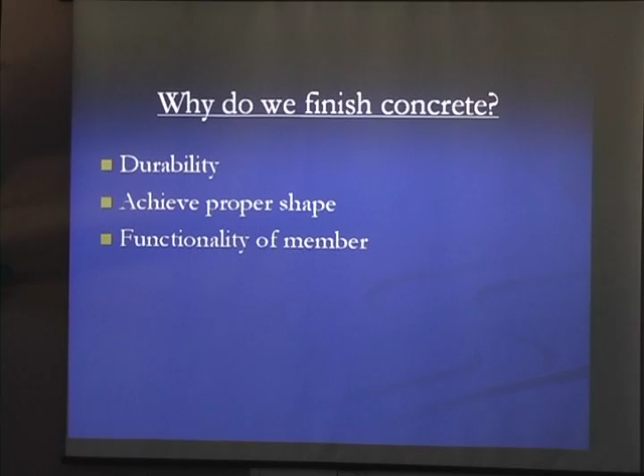And there's some other reasons too. We want it to be shaped properly. Sometimes the shape of concrete is important to what it's supposed to do - the function of the member. When we're thinking about this concrete that we're pouring, what's it supposed to do? Why are these details in the plans the way they are? What's the function of that member?

Appearance is another thing. A lot of times we want to look good. Appearance makes a big difference. And it's also a contract requirement that we properly finish concrete.

All right, durability, let's get up there. The American Concrete Institute says durability is its resistance to weathering action, chemical attack, and heat, abrasion, and other degradation processes.

What is this? Weathering action - we're talking about elements: rain, snow, sleet, wind, working on that concrete, just exposure to the elements. Chemical attack - what kind of chemicals attack our concrete?

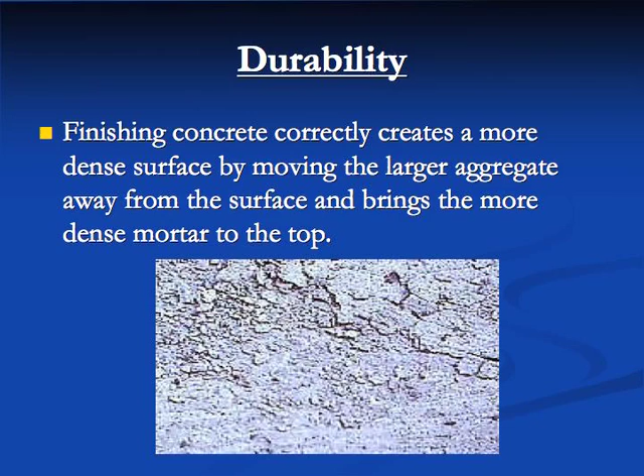It consolidates it. It seals it - seal is a big word. Finishing concrete correctly creates a more dense surface by moving the larger aggregate away from the surface and bringing the more dense mortar up to the top. That more dense mortar, when you bring it up and strike it off, seals that concrete up. We don't have a lot of exposure to porous aggregates on top.

That's not really a good picture, but you can see how that used to be concrete. Now it's crumbled up concrete.

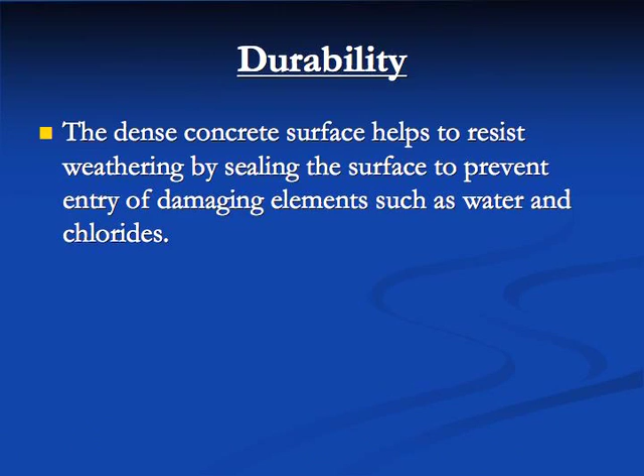So the dense concrete surface helps to resist weather by sealing the surface to prevent entry of damaging elements such as water and chlorides. Chlorides cause a lot of damage to our structures, right?

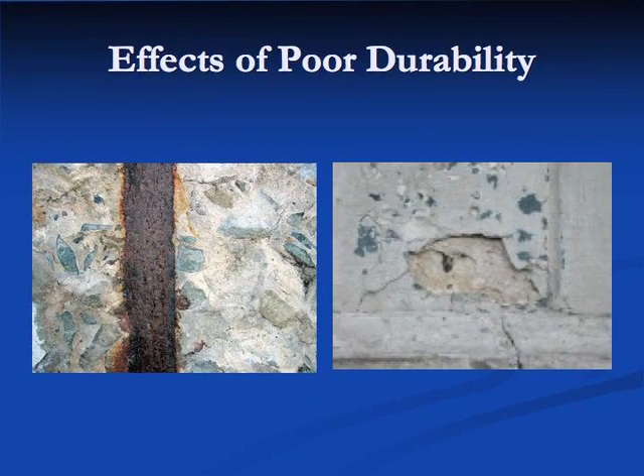What's that a picture of? What's this big brown thing right here in the middle? What's this loose, crumbly concrete? That's a piece of reinforcing steel. What's wrong with it? It's rusted. What do things do when they rust? They grow out. You get a crack in the concrete, a little spalled area exposes that steel member to the air and the chlorides, and it starts to rust. That rust builds up, that scale expands, causes more spalling, more cracks, more rust.

What happened to that Charlotte Footbridge at the racetrack? I'm not 100% sure, but I think what happened was they used pre-stressed concrete members and introduced calcium chloride into the concrete. Whenever they cast those members, it ate that cable, that pre-tension cable, and when it got loaded it no longer had the pre-stressing reinforcement. People were on it, and it failed. We had problems with that - it may not necessarily be a finishing issue, more so a construction issue.

All right, a couple other pictures of poor durability. This is a curb and gutter line on an old bridge. Where do our salts and chlorides end up a lot of times? In that gutter line. Once you get a little spall started, especially in a very susceptible area, it continues to work on it and it doesn't stop until we replace the bridge.

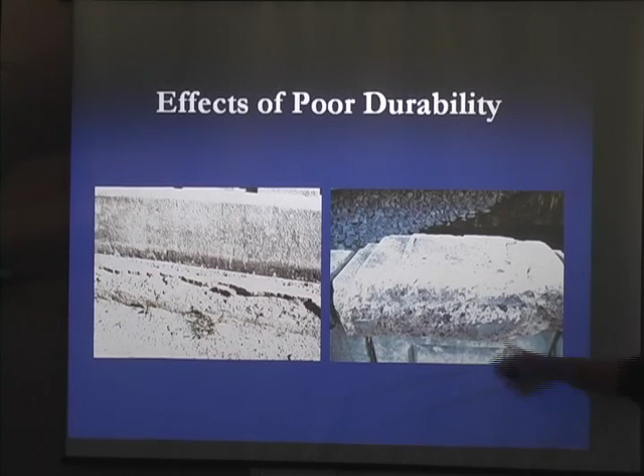This one shows some weathering action. This bridge gets a lot of - some of these mountain valleys get a lot of air, a lot of wind through here, a lot of rain. Some of this looks like it's been beaten off with a hammer, but a lot of this exposed aggregate you see in this area has come from just weathering. It doesn't look like somebody's been beating on it. So anyhow, a few things that can happen.

All right, moving on to proper shape. Why is proper shape important? Think about it - it's very important on certain types of members, like curbs. What are they designed to do? What's the function of that, other than keeping us from running off into the river?

Or if I go down the road and I'm not paying attention, reaching for something in the floorboard, and I hit one of these, hit a barrier rail, what's it supposed to do to me? Spin me around the highway? Send me right back in that same direction I was intending to go anyhow, right?

All right, proper shape. That's the reason it does that, the shape. Shape up, same way with curbs. Let's talk about bridge seats and caps.

What happens on a bridge? We got bridge seats underneath, above a bridge seat we got a joint, usually some type of joint. What happens on that joint? Hello, you bridge maintenance guys, what happens with bridge joints? Well, they stay sealed up forever, right? They leak. What happens then is that opens up a pathway for all your salts and water to go down around their bearings, and then they start eating up, destroying their bearings. They destroy our girder ends.

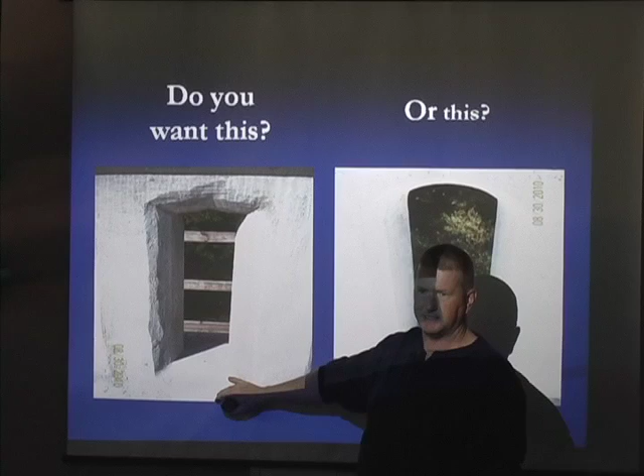All right, proper shape, which one do we want? This is the first pop quiz. You want this one, or this one? Have I got my proper shape on this decorative rail that I'm paying two or three more times the barrier rail price to get? Like I said, am I satisfied with that?

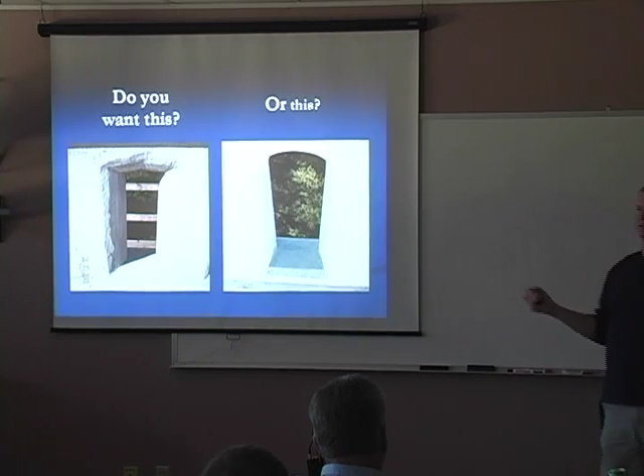If you are, I keep telling you this, but if you're not, then what we're looking for is nice, clean, neat shape, straight lines, good appearance, proper shape.

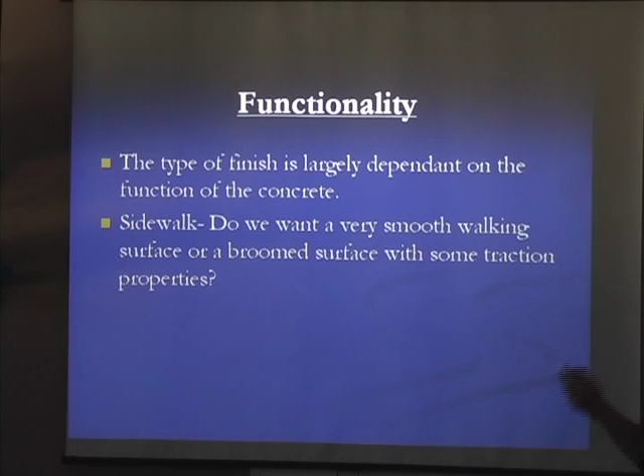What do we do about sidewalk? How do we finish sidewalk? We broom it, right? What's the function of that sidewalk, to walk on? Part of walking, we don't want to slip and fall and break our neck. So we give a broom surface to sidewalk because of its function. Everybody knows what broom sidewalks are, but that's a good example of why, when we're finishing concrete, to be thinking about function.

Something a little bit more important about, I'm going to jump back on bridge seats. What are their functions? What's the function of those bridge seats? They just transfer that load from the bridge deck through the girder, through the bearings, into the cap, at the seat, and down to our foundation, right?

We'll talk about construction joints in a minute. Think about it, we're loading up a bridge seat. What's the function of that bridge seat? To transfer that load, right?

If it's a little uneven and I've got an elastomeric bearing pad, then it sort of takes care of a lot of problems. It sort of conforms to the shape. Maybe it ain't too bad if I don't have a real bad, poorly finished bridge seat.

But think about more rigid bearings, such as a pot bearing. You got your masonry plate at the bottom, got your load coming down, nice even bearing surface, we got even load distribution on our cap. That's what the designer intended to have. That's why he drew those pictures with straight lines instead of squiggly lines on the plans. He intended to have good uniform load distribution through that cap. It's a major part of his design that he's not point loading, he's got uniform loads.

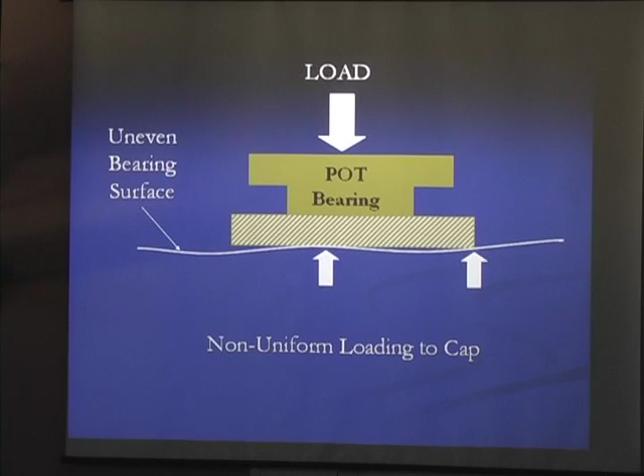If we got an uneven bearing surface, poorly finished, something happened, missed a grade, then when we put that same load through that bearing, we get point loading down here and it's not uniformly loaded. So this is not what the designer intended to do. So finishing concrete can have a major influence on the function of that member.

All right, mention construction joints. On the culvert floor, we pour the floor slab, we put a little riser wall here. Sort of hard to see, but little riser walls here, to center forms against the pour walls. How important is it to finish this construction joint? What does it do?

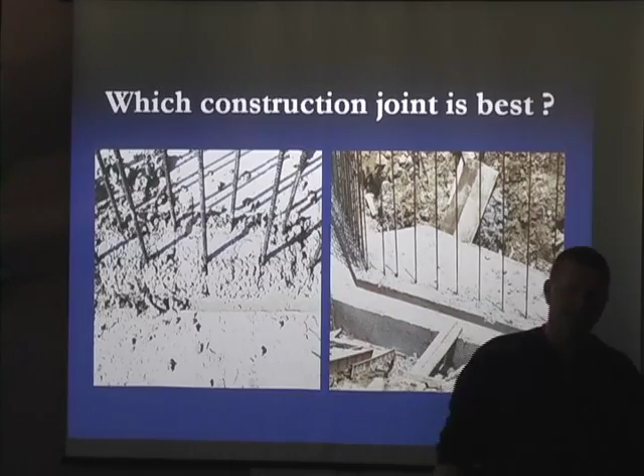Which one would you rather finish? Which one would you rather have on your project? A nicely finished wall riser, or like this one or this one? This one, right? Why is that necessary? When I put my wall form up here and I pour my concrete eight or nine feet down to this wall, and I stick my seven-foot vibrator in there, what happens when I pull that form off?

Honeycomb - we don't want it. Am I getting good load distribution through this? If I got a rough area, am I not getting good concrete contact? No. What about this one where I got nice, good, straight, neat joints, building a construction joint? I got more of an opportunity to get good consolidated concrete down here at the bottom, and I get good load distribution from the walls. Everybody's happy, done a good job.

You pull the forms off, you see all kinds of things in there - big honeycomb, reinforced steel, daylight, or water in it, it leaks. It all happens, you see it all, do it all. So think about what is the function of this thing I'm doing, and is my contractor helping me achieve that for proper finishing of the concrete?

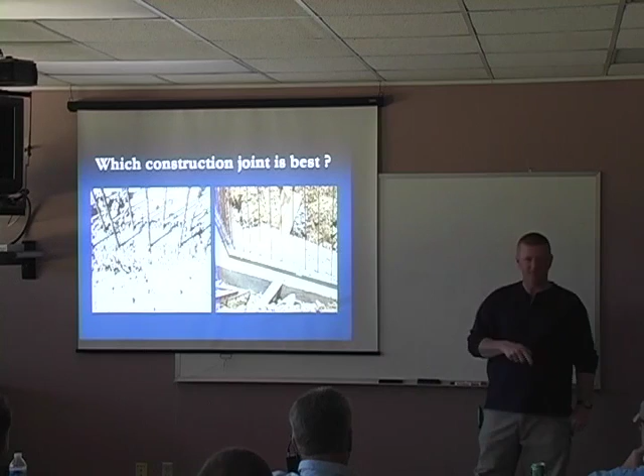Moving on, appearance. What's so great about appearance? We're building a bridge to drive on, right? We want it to look good. Bottom line, when we build something, we got a lot of concrete out there - it's a statement about the quality of work we're doing. If we give you an ugly looking product, what's your initial thought as a driving public thinking about the quality of that work? Bad, right?

I told them in class yesterday, we got highways full of highway engineers going by every day inspecting our work - we call them traveling public. They're all highway engineers, or so they think, and they can judge the quality of our work just based on what it looks like. So make it look good, uniform color and texture - it's all part of obtaining a proper finish.

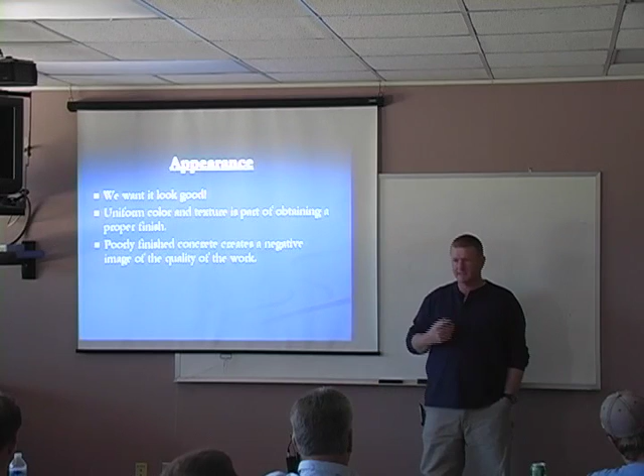There's a mention that poorly finished concrete creates a negative image of the quality of work. When we talked about that bridge we rode across in Eaton, we noticed it looked good. The guy that done that, what was he? What type of finisher, what type of laborer was he? Did he take pride in his work? Yeah, he wasn't just trying to get it done, he wanted it to look good. He took pride in his work, and in return we got a better product.

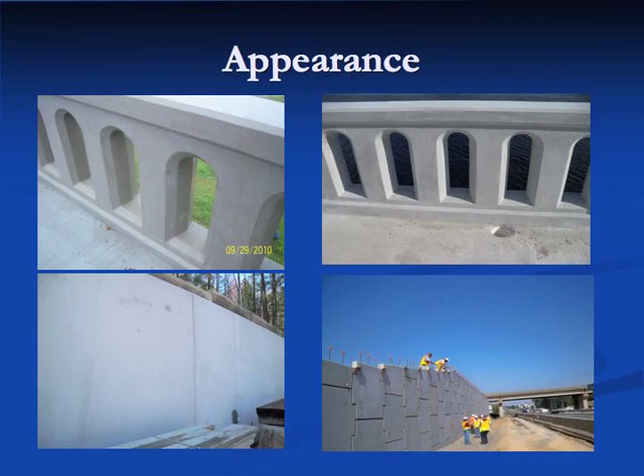So we go down the road and we see ugly looking rail - negative image. What's the first thing you see when you come up on a bridge site? You look at that rail, you're not looking at the columns. You see the part that you can see - walls, MSE walls, gravity walls, or soil nail - any kind of big concrete draws your attention because it's a big old huge mass of concrete. And what does it look like?

Make it look good. That guy who come in here really worked that and put a lot of effort in there - we talked about it a little bit yesterday. He was an artist, a craftsman. He wanted it to look good, he wanted to make it... but that's disappeared. Now we've got folks where the concern is not doing good quality work - the concern is getting it done so I can get paid and do something else.

Back to appearance. Contract requirement - goes without saying, but let's say it anyhow. According to your standard specifications, we require the concrete to be finished correctly, section 420-17. If you don't believe me, look for section 420-17 in your spec book, that covers the whole section on finishing concrete properly.

What does it say? Finish all concrete as required by this article, except bridge decks. Cameron spent most of the morning telling us how to properly finish bridge decks - I'm talking about everything else. So all concrete except bridge decks - we have a special provision for bridge decks. Everything else falls under 420-17.

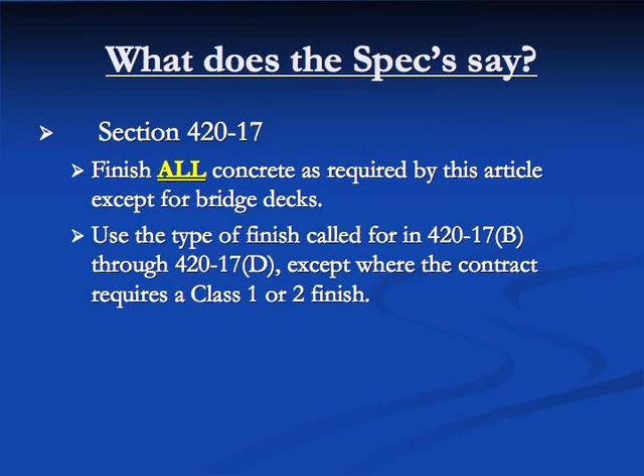The type of finish is explained there. We got different types of finish, we'll talk about that here in a little bit, but it tells us how to achieve those finishes. Here's our types of finish: we got ordinary surface finish - most all the concrete we do, if it's formed, gets ordinary surface finish. Unformed surfaces, sidewalks, islands, all have a particular type of finish - Class 1 and Class 2 finishes. These five different finishes is what DOT requires on all concrete, with the exception of bridge decks. Before we get into that, what do you think affects the concrete by the finish?

Another factor is the type of concrete mix. Our higher strength concretes, our double A's and A's, have more cement in those mixtures than our lower classes. So more cement means more mortar. Our cement and fine aggregate make that mortar. With these higher classes of concrete, the double A's and A's, they have more mortar, more cement, for finishing. Obviously, that makes it easier to finish.

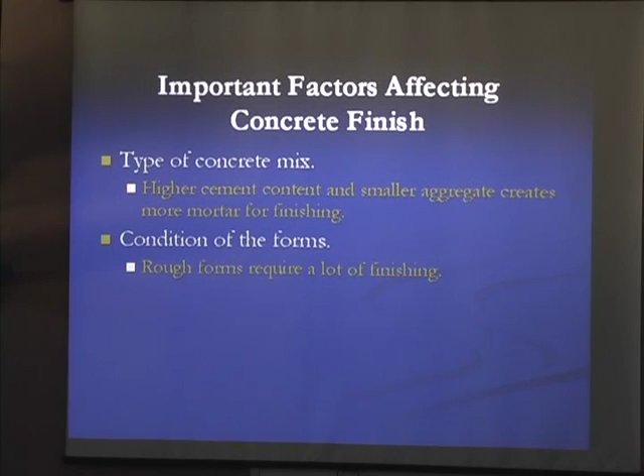Condition of the forms. If you've got a rough form, what's your concrete going to look like when it comes off? Just like that form, right? Placement and consolidation - can I properly finish concrete if I don't properly place and consolidate it? No, it makes it hard. You can finish it, but it takes a lot more work to do it.

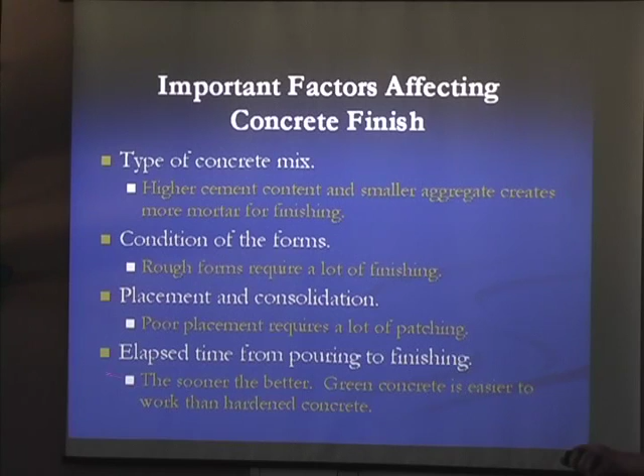And elapsed time from pouring to finishing - really, the sooner the better. The longer that concrete sits out there, the longer it waits, the hotter the weather is, the quicker it sets, and the harder it is to finish that concrete.

Alright, let's look at a few of these. Form condition - have y'all seen any of this stuff on your project, any of these types of forms? I've got openings here. I've got this sticking up about three-quarters of an inch higher than the other one. That form had rolled up. It's been out there in the weather, they've used it 14 million times, and it's rolled up.

Contractors use it anyhow because forms cost a lot of money. I've got spalled out areas in it. If I pour concrete on top of these forms, what's it going to look like when I pull the form off? It's going to look like the opposite - a mirror image of that. Is that easy to finish? If I've got to get in there with a stick and take care of this?

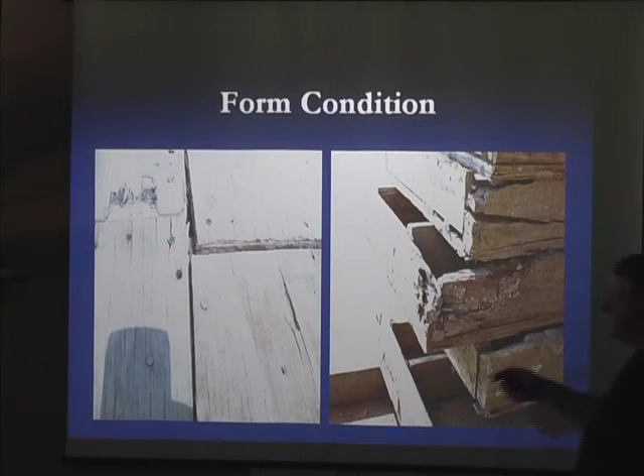Sometimes a contractor may have some gaps in his forms because everything's not perfect. If he fills that in with expanding urethane foam or whatever, once it sets, it needs to be trimmed back so you don't have a big knot in your form. That just allows him to use those forms, period - you don't have to worry about it.

What about these? As far as the cracks, especially on a curved bridge or curved girders, just trying to get it fit up, you're probably going to have some cracks in there, and they'll probably try to seal it with 'great stuff' or similar foam. If they do that, make sure you get it trimmed off flush with your forms and don't leave a knot.

But if you see junk like that, I don't care if you're getting ready to pour concrete - if you walk out there and notice a big blistered up form, you have every right in the world to tell them to take it out. Something warped like that, you typically try to get rid of.

Once it's flat, you can transition. When's the time to start looking at these forms? When he's got the steel in it, ready to pour? Yeah, he starts forming this stuff - take a look at them as they bring it in and drop it off. Looks like these forms are actually used.

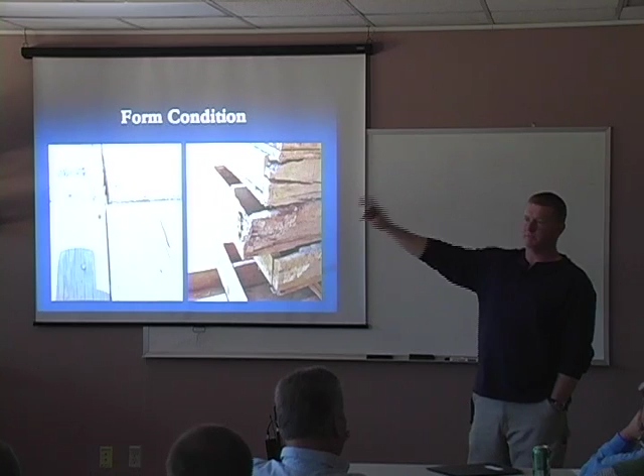When these particular forms were removed, part of the face of these forms stayed in the member that was cast. Is that a finishing nightmare? Absolutely. And another thing about the condition of forms - if that form is going on the fill face side of the end bent, that's one thing. If it's going on the face of your wall, like a cast-in-place retaining wall, that's something entirely different.

So think about what it's going to look like when I get done. Do I care if I've got a bad looking place on the back side of a fill face? Probably not. Do I care if this is out there where everybody can see it? This is going to have to be fixed and we're going to have to work it.

If you get stuff like this, tell them these things are old or dilapidated, got a little termite damage. They've been around a while. These need to go in the dumpster. And that's ultimately where these ended up. The guys formed the concrete, he wanted to keep them, use them on the next job. Prime said, nope, them's going in the dumpster. And that's where they went. He loaded them up and threw them away.

But anyhow, form condition means more, it's got a large influence on finishing. So when we talk about finishing concrete, where does it start? When they pull the forms off? When does the mindset think? When does it start? You need to start thinking about finishing that concrete when you start forming it. We need to start thinking about what it's going to look like when we take it off.

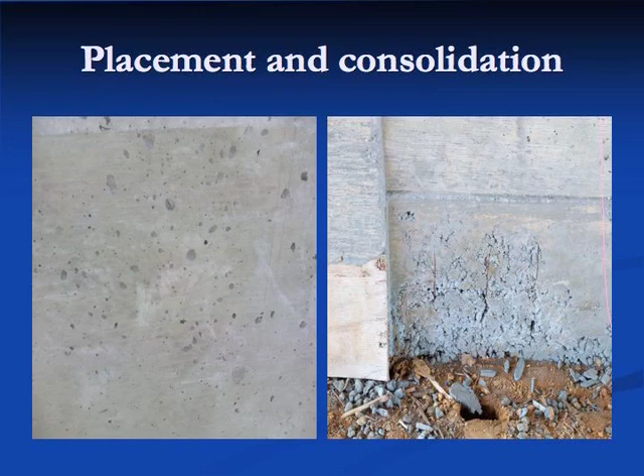All right, placement consolidation. Get anything look like this on your job. Pull the forms off, we got some pretty large air pockets in here. Nothing looks real structural, but some of these things need to be patched. We got some places that need to be fixed. What's this booger over here?

Anybody seen that before? How do we need to fix that? Smear a little grout over top of it, right? Hide it. Guys, you pull your forms off, bad day or whatever. We don't get good consolidated mix up here. We need to take a little bit of investigation. Y'all guys mentioned chipping it out. Get hold of your hammer and take a look at it and let's see what kind of problem we got here.

Does this segregated concrete mix go all the way through the deck, or is it just a little bit of surface irregularities? That's a question you need to ask yourself.

Once we do that, we need to decide how we're going to fix it. If we got a great old big void in here, by all means that needs to be chipped out and put back with something other than grout. If it's just a little bit on the surface, maybe we can seal it up with some grout and be fine.

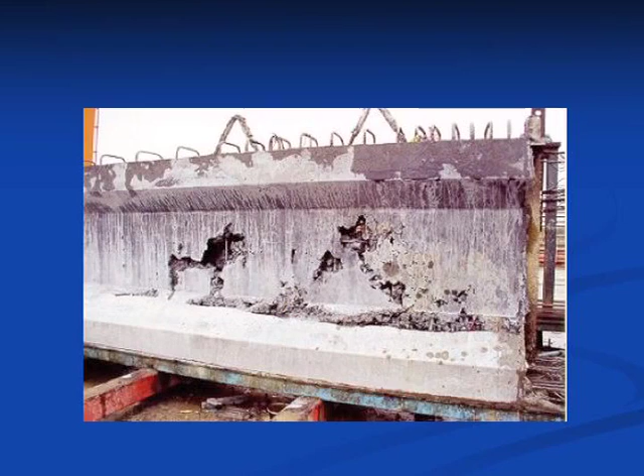All right, what about this? Grout it up and send it out to the job, right? That's good to go.

Bad things can happen. Had some slip form barrier wall that turned out looked pretty good on the outside. Got ready to bolt the guardrail to it, bored the hole in, inside it was hollow. We found the hollow place. Things can happen. We don't fill this thing full of grout. If you do, flag it so I don't drive across it.

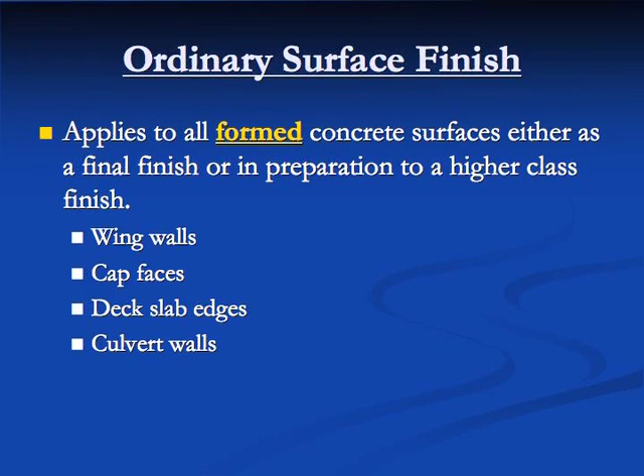All right, going back, ordinary surface finish applies to all formed concrete. If we lay up two sheets of plywood and we pour concrete in between it, it's formed concrete. Anything we form, unless it requires a different type of finish, gets ordinary surface finish. So what I'm talking about: wing walls, caps, edge of deck slabs, culvert walls, gets ordinary surface finish. How do we get it?

All right, proper placement of concrete, as we mentioned, is a major factor. If we place it poorly, we got more work to do to get this ordinary surface finish. We're using ordinary surface finish on probably 90% of what we do, other than bridges.

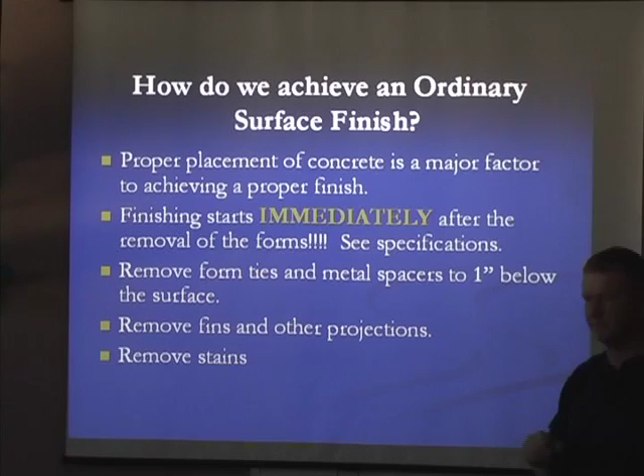When do we start? If you don't get anything else out of this presentation, the best thing that's gonna help us, finishing starts when? Immediately. On your handouts, on your slideshow, take your pencil and circle immediately like 12 times. Or when you flip through it, you'll know it means immediately, after removal of the forms.

Why? The specification tells us that, but why is that important? It's easier to be able to get what we want. What if we wait two weeks? What's happened to that concrete in two weeks' time? It's cured, it's dense. What's happened to that mortar? It's set, right? Can I get that mortar back up? Can I work that mortar back up to finish it?

No. The reason we're not doing this, well, why is the contractor not doing that? What's his goal in life? Time. That's right, time and money. What does it take for me to do this? A couple people. If I pull that form off, what am I going to do with that form? I'm an ambitious contractor. I'm going to take it down here and I'm going to put it up again and I'm going to pour more concrete in it, because that's how you're paying me, by how many cubic yards of concrete I put in that form. All right, we also pay them by how much it's supposed to be finished.

So is he caring about finishing that concrete? No, he's worried about making pour more and more and more. We'll see some effects of that here in a little bit. All right. Finish starts immediately.

Remove form ties, metal spacers 1 inch below the surface. When you put them in there, you use snap ties, break them off, little cone, pop that cone out. It's supposed to be patched in, 1 inch below the surface. Fins and other projections, we will remove those. Like the places where you got 2 forms come together, you pour concrete, you get a little fin between them 2 form marks. Remove those. That's required of ordinary surface finish. And removing the stains.

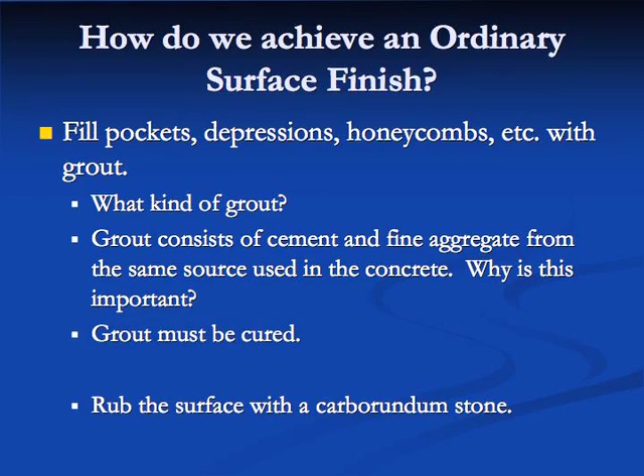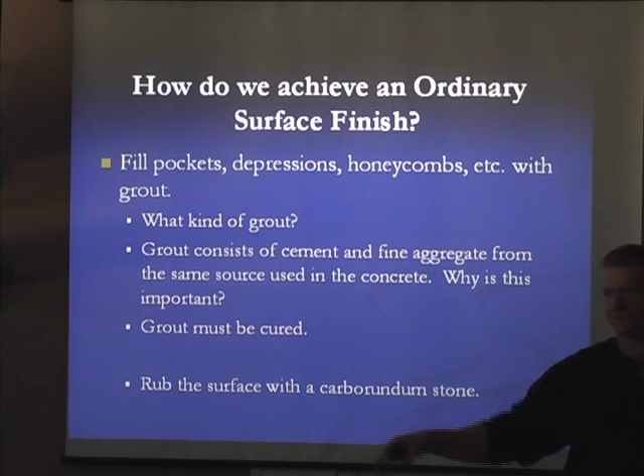Once we patch it, what has to happen to that grout? Got to cure it. Whether we use non-shrink or bagged sand, grout must be cured because it's just the same as concrete. We want to give it every opportunity it can to bond to that existing concrete, and we want to make sure that patch is not cracking or falling out of shape. So we want to cure it. Give it every opportunity to do what we want it to do.

After we've removed our fins and our stains, and we've filled our pockets, depressions, honeycombs with grout, we're going to rub the entire surface with a carborundum stone, or a rubbing rock as I like to call it, because that word's too hard for me to say, to a uniform color and texture. Pretty simple.

How do you get this? What you got to use to get this? Manpower, labor. Takes time, takes money, right? Labor takes time, time's money. Money's what the contractor's after. How do we get his attention? We gotta grab him in the pocketbook. Is he doing what we want him to do? It takes time. That's why he's wanting to pour that concrete, so he can make that money.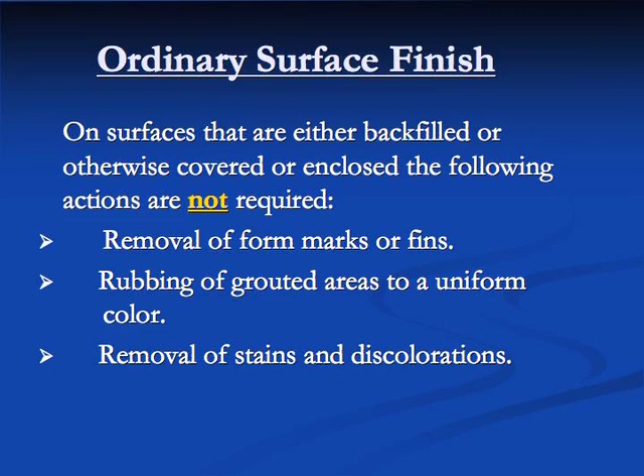Now, on ordinary surface finish, on surfaces that are either backfilled or otherwise covered or enclosed, in other words, we'll never see them again, hopefully, the following parts of ordinary surface finish are not required: removal of form marks or fins, rubbing of the grouted areas to a uniform color, or rubbing the whole surface to a uniform color, removal of stains and discolorations.

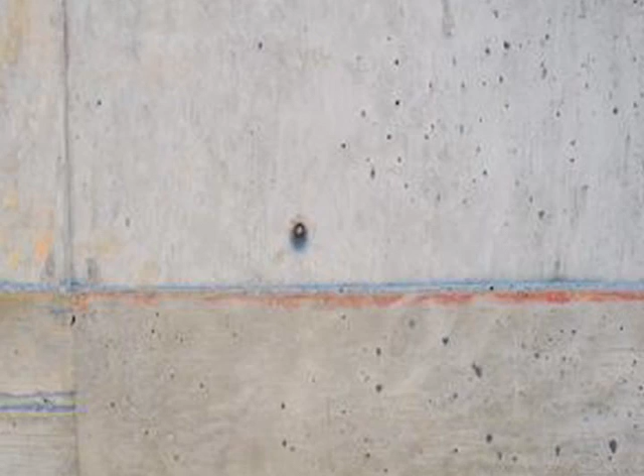So if we're on the backside of a wing wall, all we've got to do is patch any depressions, pockets, honeycombs, remove form ties and patch, and we're good to go. We don't have to rub the whole surface to a uniform color and texture, but we got to take them off. If there's a little pocket where a form tie was and you broke it off, we got to patch that area. You may have some pretty big air pockets in here. We need to put some grout in.

What about form ties that are less than, I think it's 0.05 square inches or something, but it comes out to be form ties less than a 1/4 inch in diameter of steel. On the back side, we can cut them off flush. We don't have to take them down 1 inch below the surface.

For less than a 1/4 inch, we can just take our grinder and zip them off. Most time, contractors use these form ties and they'll twist them and they'll break off back in there. If they do, we need to patch that hole. But backside, we can leave it looking a little rough. We're gonna cover it up, nobody will see it. If it's exposed, then we need to finish it. We need to patch it. We need to remove the forms and the fins, rub it to uniform color.

All right. On caps, it tells us exposed surfaces should be rubbed to uniform color and texture. Top cap should be finished smooth, which conforms to the plan details, grade, slope, etc. in your plan. There's your bridge caps. That's where you want to get your drainage. You want to make sure you got a good uniform loading system on your railing, parapet walls, your barrier rail, end post.

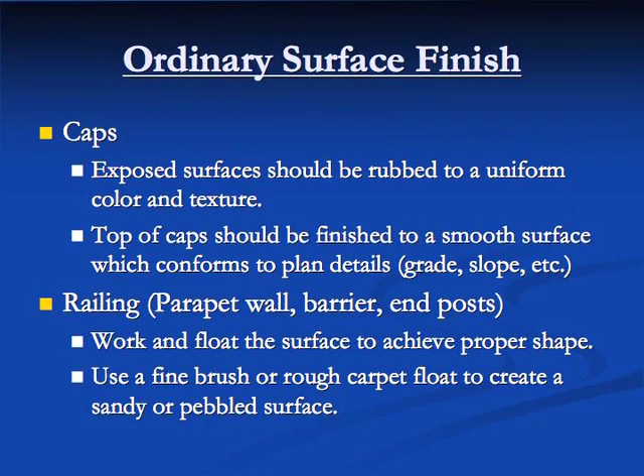Once you work the surface and float to achieve a proper shape, there's that shape word in there again. Use a fine brush or rough carpet float to create a sandy or pebbled surface. All right. And we generally do a pretty good job on that. We get our shape, and then they'll broom it and brush it to get a little grainy, pebbly surface. So that's good. That's what we're after.

There's a picture of an ordinary surface finish. Good uniform color, good texture. If you look real close, right in this area, you see a little circle. Maybe we had a form tie and we've patched it. It may be hard for y'all to see, especially in the back of the room. But right in this area, it's a little bit darker.

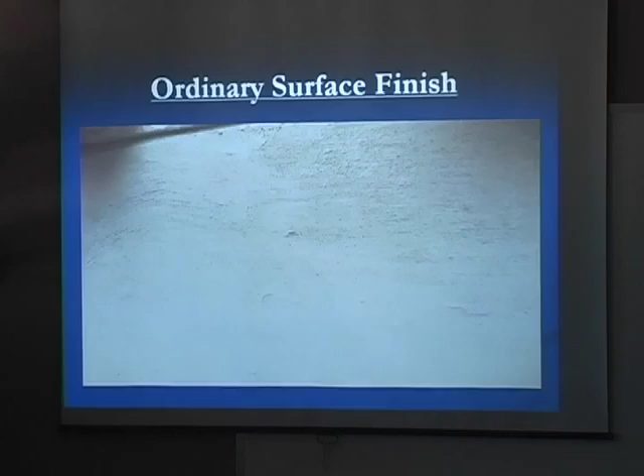And what it tells me is maybe we didn't use cement from the same source of aggregate. We used some non-shrink grout and we patched it over. And then when we rubbed it, we tried to hide it, so to speak, blend it in. So, but overall, a pretty good picture of ordinary surface finish.

I don't know why that projector's a lot brighter than that other, because these pictures aren't showing up. But picture some barrier rail, it's a good grainy texture to it. Projector's real bright. It's not bringing out the pictures as clear as I want them to. But anyhow, good picture of ordinary surface finish. Yeah, that one sort of. There's two big white blobs that don't look too good. But anyhow, they're ordinary surface finish. So, that's what we're looking for.

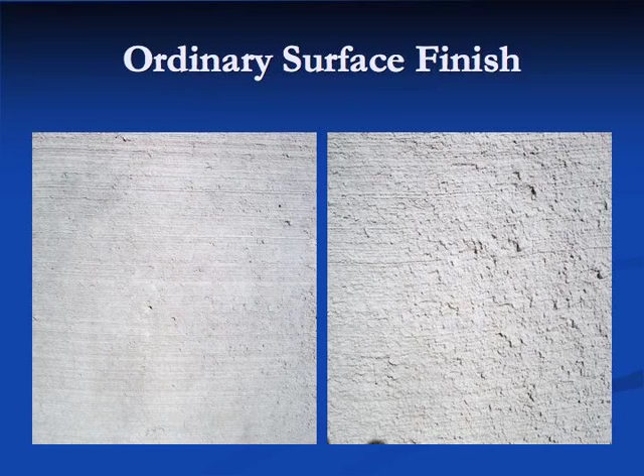Cameron's passed out a couple of these. Just give them one. That's the surface of that, the one that looks like it's been finished. What we sort of look for in an ordinary surface finish: it's not slick, it's rough, it's got some texture to it, uniform color. It's what we're looking for. It's got some

Unformed surfaces not subjected to wear. Alright, what we're talking about is things like the buried footings, top of a footing. It's unformed. We dig a hole in the ground, pour it full of concrete, maybe the top of a shaft or something that we're not forming the top of. We finish it by striking off excess with a wooden template, forcing coarse aggregate below the surface. Pretty well the whole requirement for an unformed surface not subjected to wear. In other words, we're going to cover it up with something.

When we just finish it off with a wooden float, what does that do? What's the purpose of doing that? Why do anything? But what's the purpose of just raking it off, bringing it to the proper grade, and floating it down one time? What's the purpose? Sealing the concrete. That's the one I was looking for. Seals the concrete. That's the purpose.

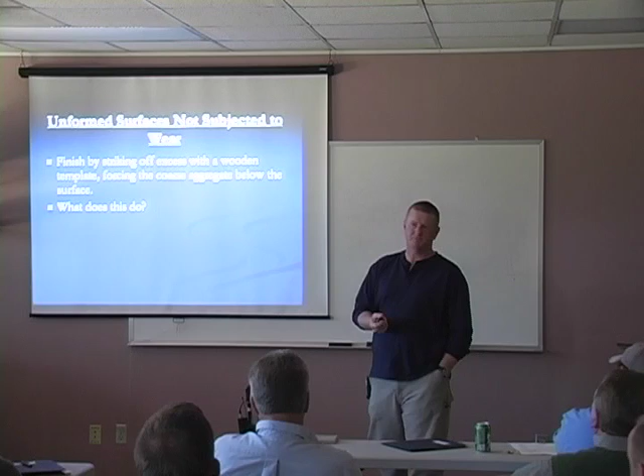All right. Sidewalks, islands, and stairs. When you're doing sidewalks or islands, we're going to have to build a form or something to put in. The top of it's going to be exposed, but of course it is going to be subjected to wear. So we may have a side form. We pour our concrete in there. We strike it off. Take a float. We float it down. Then we trowel it smooth. What does that trowel do?

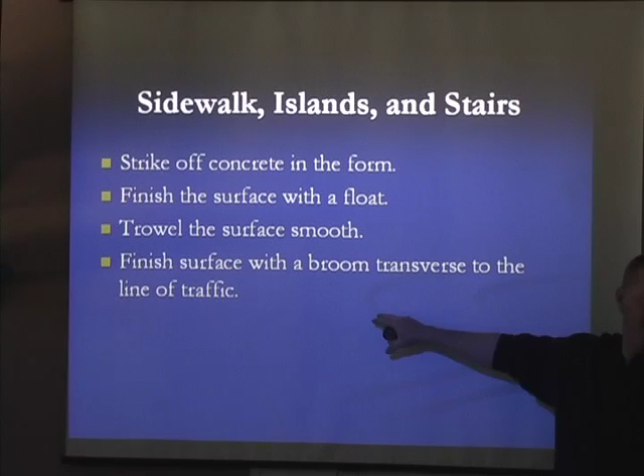Brings more of that dense mortar to the top, right? Slicks it off. Then we're going to broom it. In order to broom it and get a good job of brooming, we've got to bring that mortar. We've got to get a good mortar bed on top of it to do that with. And that way, when you broom it, bringing more mortar to the top with the trowel does not allow it to catch those little bitty small aggregates and flip them up.

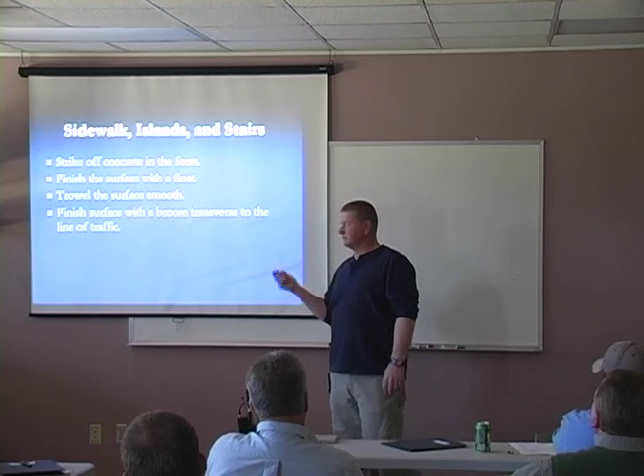Anyhow, sidewalks, islands, stairs. All these are in your spec book. It tells you word for word what I got here. Couple pictures of broom finish. And guys, I apologize because that projector's a little better than what we're used to. It's pretty bright, but broom finish. Y'all know what it looks like.

You've seen it before. On this particular one, we did some sidewalk on the Integral Bridge, but we had the construction joint down here. What should we maybe have done differently here? We should have put the joint right here instead of right here, shouldn't we? Yeah. So, but we did. You know, hindsight's 20/20. We screwed up.

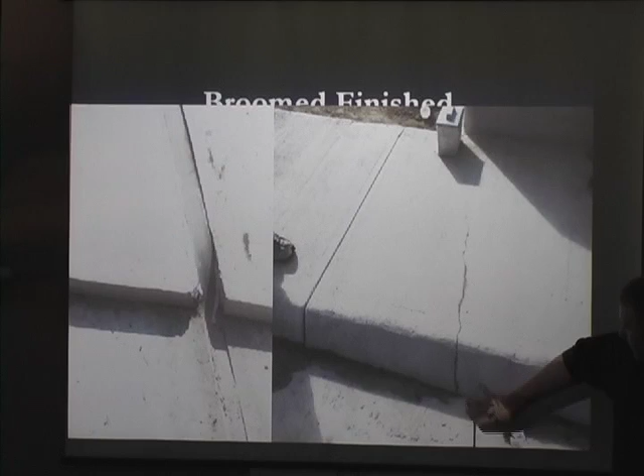And if you ever have a cored slab or a box beam bridge that has got deck drains running underneath the sidewalk, you better go back over every one of those deck drains. You need to double joint it. If you don't, you're going to end up with a joint looking like that right there. Sometimes they just put a pipe or something through the sidewalk. It could be a square or round pipe. They will crack. All right. Moving on.

Class 1. What do we use a Class 1 surface at? Parapet walls, decorative bridge railing, anywhere we need a more aesthetically pleasing look. How do we know if we've got to do a Class 1 finish? The contract, the plans, or a detail in the plans showing this wall requires Class 1 surface finish. Something's going to tell us that we need a Class 1 finish. All right. How do we get it?

So we pull our forms, we start patching our areas, we fill our depressions, we do everything. As soon as that pointing sets and we get those little repairs made, what do we need to do? Wet the surface and rub with a coarse stone to create a paste on the surface. This removes all the form marks and projections and produces a smooth dense surface without irregularities. Smooth out the paste and allow it to take a reset. Cure it for 7 days, and then go back over it with a fine stone to smooth the texture and get a uniform color.

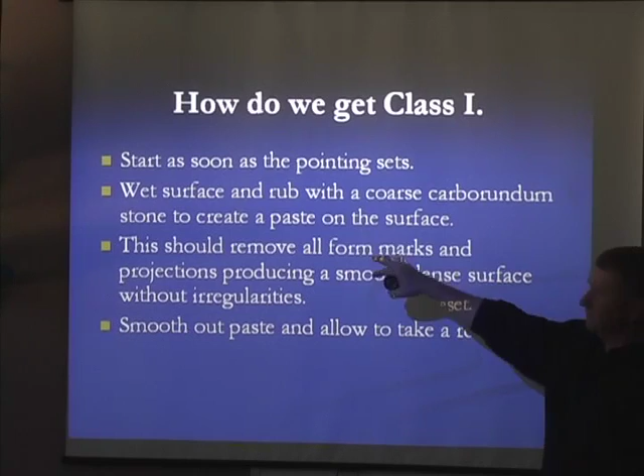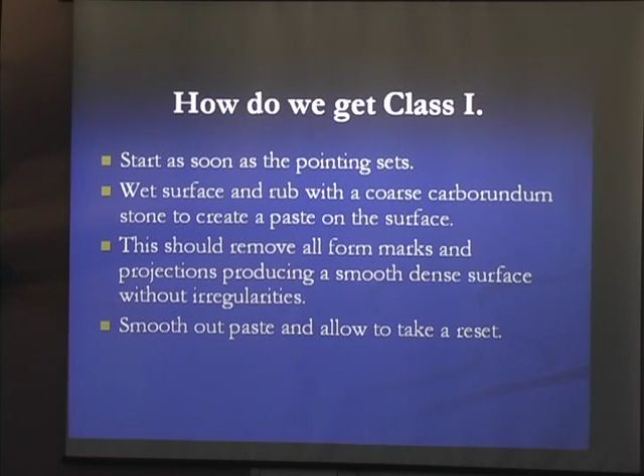So, what has he got to do? Wet the surface and do what? Rub. And what did we say rubbing was? Rubbing's labor. Takes time. Takes effort. We've got to pay some guy to go out there and wet that surface. He's got to rub it and bring that whole surface to a uniform color. A lot of money goes into those. Do we expect to have higher bid prices for a class 1 surface? Absolutely. If we get a non-uniform or non-finished surface, are we getting our money's worth? Absolutely not.

Other class 1s. Rail, we've got maybe a little bit more work to do here, but we're on our way. If we pulled these forms off and left it for 2 or 3 weeks, are we even going to be close to getting what we're after? No. What about this class 1 by diamond grinding? What does that do? It looks neat, doesn't it? We got good, clean, sharp angles. What's one downfall to diamond grinding?

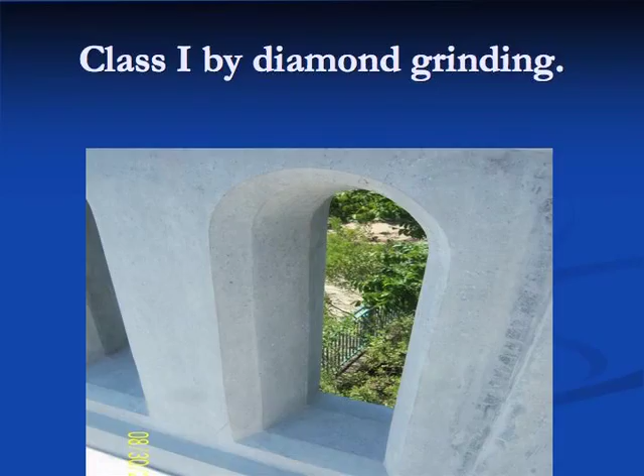I've took my grout off, I've took my seal off, and I've exposed some aggregate.

The structure's supposed to have a decorative look to it. He wanted to put forth some effort, and he put me a class 1 finish on this. He rubbed that, took a lot of time, took a lot of labor to do that. But it turns out to be a better product. We didn't pay him any more for it, but it turns out it looks all right.

So is this guy proud of his work? Absolutely. He wants something to look good. He wants to say, hey, that he did quality work and he wanted it to look good.

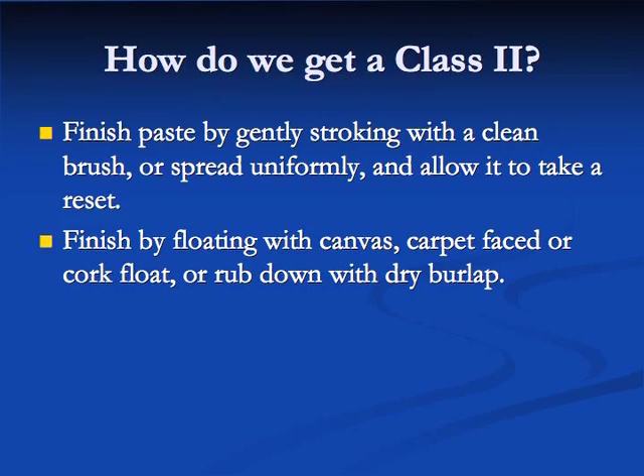Money. All right, once you've got that paste worked up, you finish the paste by gently stroking with a clean brush and spreading it uniformly, allow it to take a reset, and then finish it by floating it with a canvas, carpet, or cork float, or rub down with some dry burlap. So that's class 2.

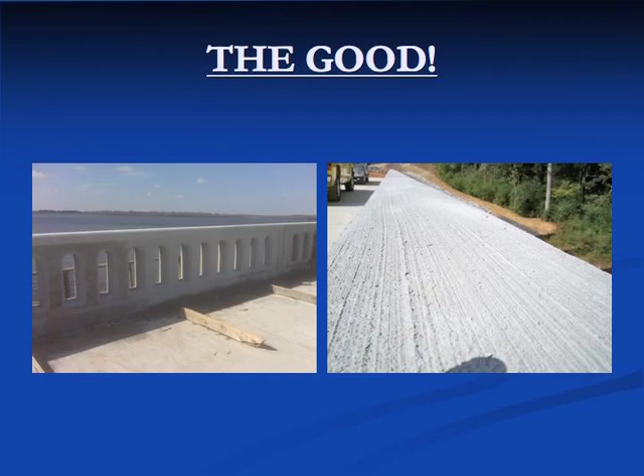All right, got a few pictures. I got the good, I got the bad, and I got the ugly. We're gonna look at the good first.

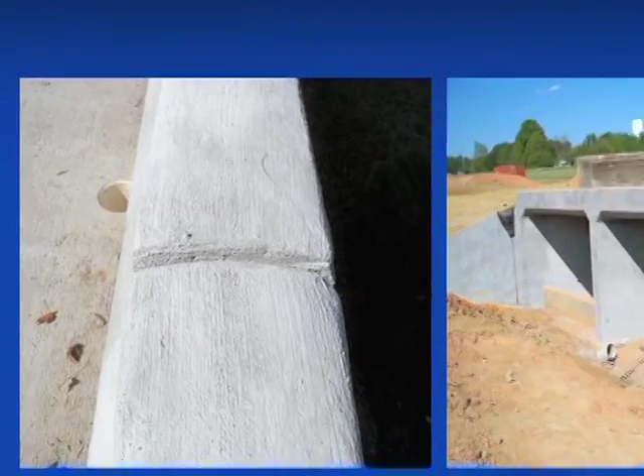Here I got the top of some barrier rail, that gives you a little picture of that more sandy, grainy, pebbly texture. I got good straight barrier rail, good uniform lines, looks good. Same thing here, I got good joints, and I've got a picture of a little bit of the bad that showed when they pulled this form out. This wall sagged down, bulged out, and the top of it's not the proper shape. That particular one looks good.

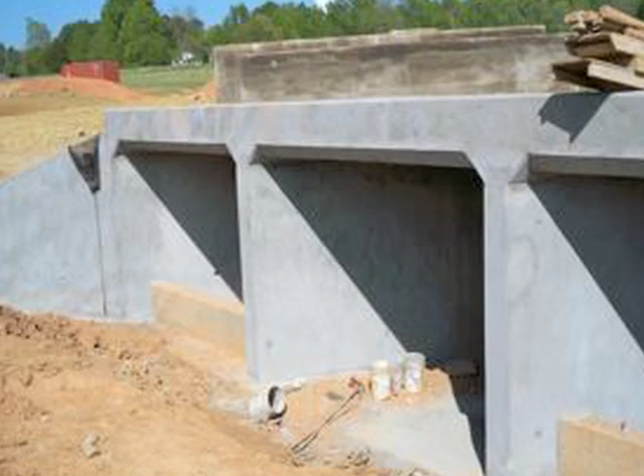Culvert wall — a culvert's gonna bury them, a lot of times you don't see a whole lot. This exposed part needs at least an ordinary surface finish. We may backfill the area on the sides, but the wing faces, the head wall, we need to finish those. We don't need to just let them go or patch them, whatever; we need to give them an ordinary surface finish. That culvert end's exposed, but other than that, it looks good. Got nice, neat, clean lines.

Good work. All right, here comes the bad. What in the world is this thing? This was a column, I'll tell you what it was.

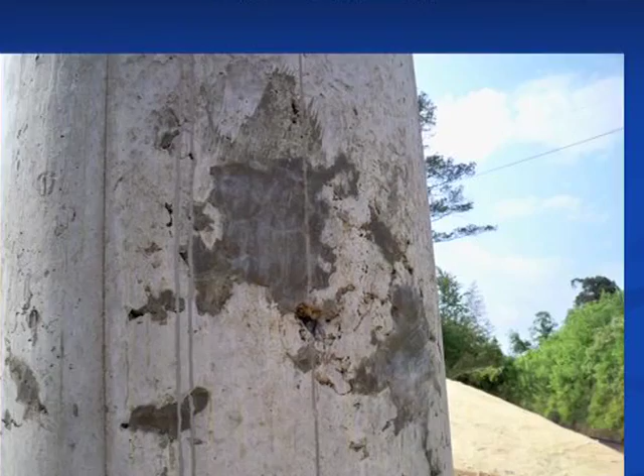What happened? Did I properly finish this column? What did the contractor do? Got paid. Took his non-shrink grout and his play sand, mixed him up a rich mixture, and packed it in here. I got a hole right here he didn't even touch, or it fell out, one.

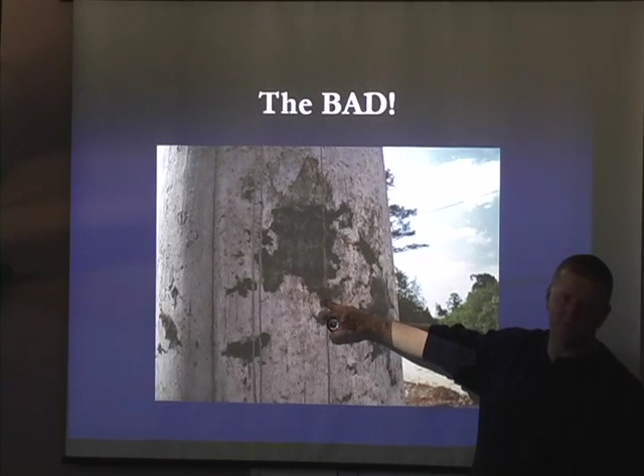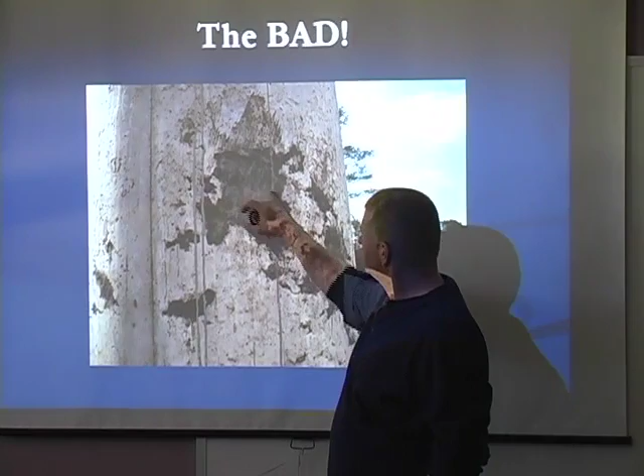Pretty good place right here. If you look a little closer, I can see little cracks in it, in this non-shrink grout. What does that tell me he didn't do? He didn't cure it properly. So we properly repair these. If I've got a worse problem underlying all this mess, I ain't seen it.

Did we camouflage it? Did we cover it up? Alright, that's the first time, second time we've seen it. First time we said you gotta patch it, you gotta fix it. That's how he fixed it.

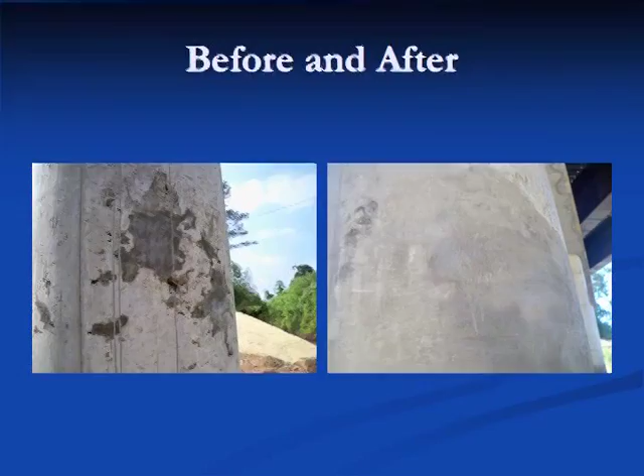Then we come back. This ain't as bad as it looks. I mean, it looks pretty bad, looks like a big old chunk, but it ain't quite as bad as it looks. Go from part 1 to part 2, come back and it looks like this. Well, that ain't too bad. It's a little rough, they cleaned that up. How did I get from here to here?

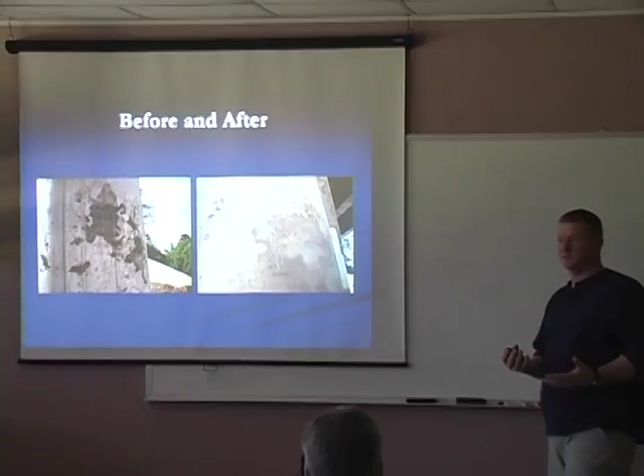I don't know. I take this picture one day, next week come take this picture. What happened in between? I don't know. That's why you guys out there in the field are important, to put your eyes on this and let us know what's going on. Did he take some more non-shrink grout and cover that up and hide it? Or does it look okay to me, doesn't catch my eye?

Actually no, but that's what I'm telling you. A contractor can come here and cover something up and make it look a lot better.

Alright, so that's your before and afters. Not necessarily this is perfect, but better than that.

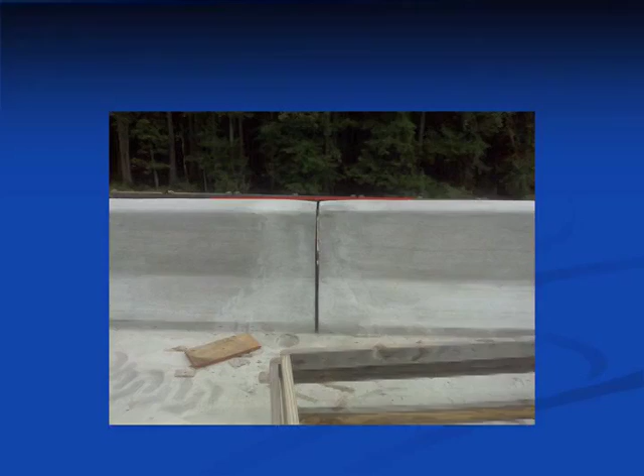Alright, there's that barrier rail I was talking about. They poured the barrier rail, pulled it out, what happened? Got about a 3/4 inch deformation right there. Did I get proper shape? Probably not.

And a lot of times what will happen too, once they've got this texture looking good, they'll pull this out and then they'll go back and rub over top of those joints. And then they won't go back and give you that green texture.

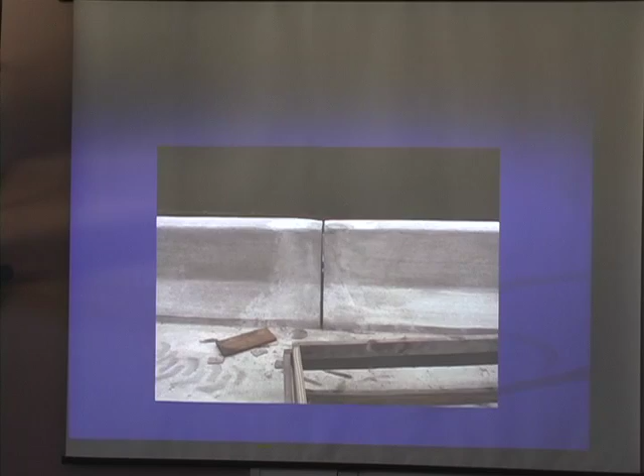Proper shape. These parapet wall things are supposed to line up. That particular one is about 1.5, 2 inches out of alignment. This is a formed parapet wall, they should get proper shape.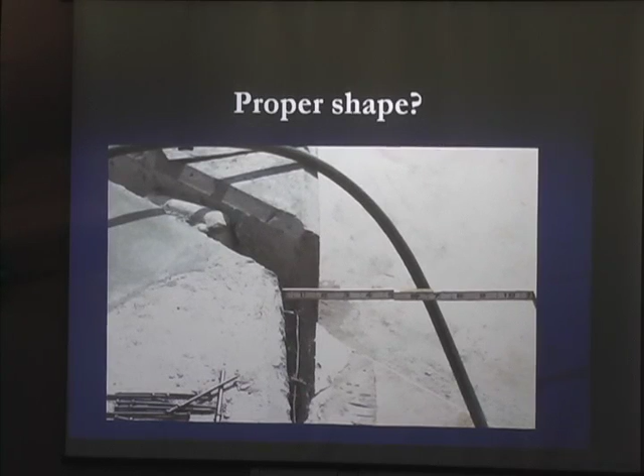How am I gonna fix that? I'll tell you how we're not gonna fix it. We're not gonna come in here and drive some nails and tie wire on it and grout it up with some non-shrink grout and play sand. There's better ways of fixing things than that. If you've got a little small place, you can grout that up. But anyway, proper shape, it would get it.

Alright, remember talking about that retaining wall being pretty? Another one, go around the corner. What does this look like? Go ahead and say it. I don't hear what you got to say. What does it look like? Y'all good with that? Class, 1?

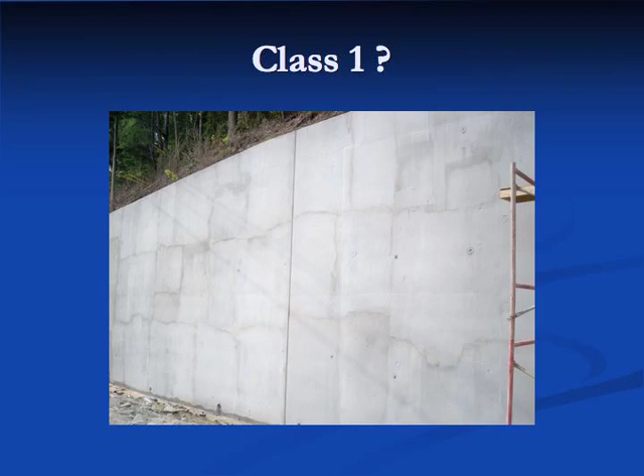Anybody say puzzle? Yeah, okay, anybody say quilt? Alright, it's one puzzle, one quilt. It's amazing, what did he do? What did this guy do?

How did the guy finish this? Well, you'll see a picture here directly to see. This is stage 2. I'll show you stage 1 here in a little bit. Or, I'm sorry, this is stage 3.

Anyhow, did you blend that finish together? No. He's out there, and I accuse him of sitting there and finishing this section, then he stepped over here and finished that section, then he got up on his scaffold and finished that section. That's a lot of concrete surface, right here we're probably, say, 15, 18 feet high. A lot of concrete surface.

What does it take to finish that? A lot of rubbing. When they did that one wall I showed you, the picture didn't turn out that great. They come carrying out a box of these rubbing stones, packed full of them. And they rubbed, and they rubbed, and they rubbed, and they wore them down to the bolts that hold the handles on. The guy rubbed and had a great big huge arm on this side and a little bitty arm on this side.

They took a lot of time, a lot of effort to get that. So, you joke about it a little bit, but it takes a lot of time and a lot of work to get these proper finishes. Doing it right takes a lot of work, but the more work you do right off the bat, getting your forms right and starting rubbing as soon as you wreck those forms, the more you do it properly, the less work it takes in the long run.

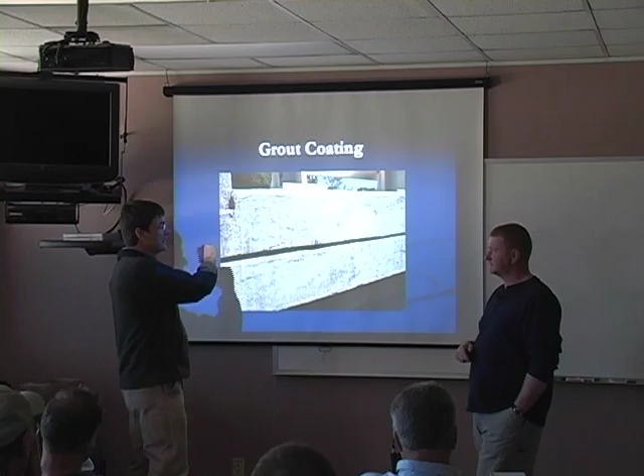The reason these contractors pull that form off and pour concrete, they don't have time to finish that concrete. One of the biggest problems we see is they'll take that grout and smear it over trying to achieve a finish. It's not bonded to the existing concrete. Eventually it'll fall off in the creek, fall off wherever we let it. That grout he mixes up is supposed to be going in honeycombs and form tie holes. If he's out there with a rubber float and a bucket, taking scoops of it and smearing it across whatever that surface is, he's doing something wrong. He's already done something wrong, and now he's trying to fix it. The paste he's supposed to have there, he's supposed to be working up out of that concrete, not out of a bucket. So, coating it with grout.

What does that look like? Stucco. Pretty much the consensus is stucco. Same wall we was looking at, trying to achieve that proper finish. This is stage 2. They just take mixed up grout. How many bags of non-shrink grout you think was on that monster? There's a lot. Not finishing the concrete.

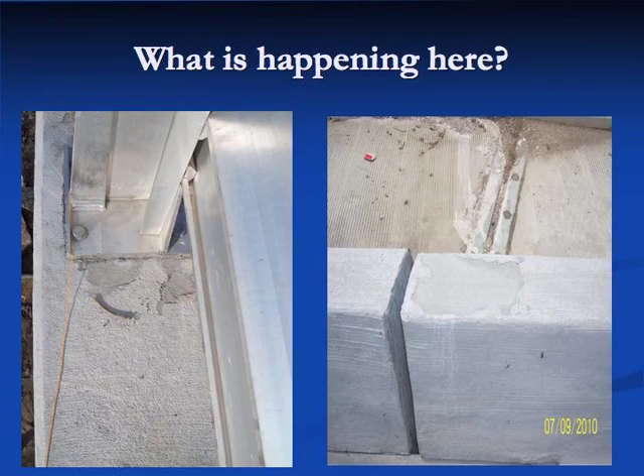What ends up happening is you'll come in there, and that same picture turns out to be that picture. We took the stucco off of it, made them go in there and grind it off, then they had to remove the form marks. Have I got class 1 finish here? Absolutely not. Can I get class 1 finish? Absolutely not, it's too late. My concrete's done set up. This concrete's probably 2 months old. I cannot get that to be properly finished. There's no mortar accessible there. It's set. All right, more grout coating.

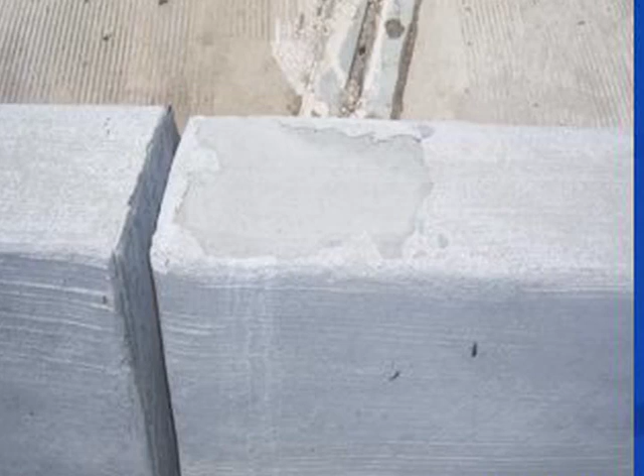This section out here looks pretty good. On top of this parapet wall, the contractor goes in there, it looks good, starts putting this post in. Falls off a piece. Wait a minute, get my hammer out and go to chipping, and that's what all this is, it's coated down with grout. Same thing here, top of this chipped off area. Is that grout mixed in good with that concrete? Is it bonded? Absolutely not. Did the grout they use come out of that? Add on top of it.

Signs that your contractor may not be properly finishing concrete. There it is, proof, evidence. Somebody asked me, is that on the same project? And I thought, actually yes it was. Thought about it for a second, it was. Non-shrink grout and play sand, even if we don't use cement from the same source of materials, and we're going to patch our holes with non-shrink grout and play sand. Those two components right there is enough to do about 20 bridge jobs.

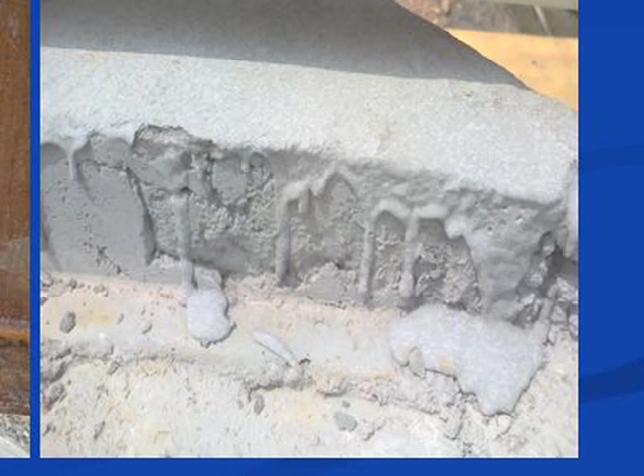Shouldn't happen, and you'll see grout bags laid everywhere. It's not properly finished. What's he done here? Concrete's just melted, got hot, melted and run over top, right? He smeared it on there and worked it up, got it good and wet. What'd it do? That's what caught my eye, that right there is what caught my eye, that wasn't properly finished. I took a piece of rebar and went to pecking on it, and started knocking chunks off. I said, guys, this is not properly finished concrete. So we had a little talk about that and they looked at me like, what are you talking about? What have we been doing?

That's the other thing we talked about a while ago, don't be afraid to back straight up, don't be afraid to pull a hammer out and hit that, whatever it is. I had a contractor tell me one time, I had one of those little old Estwing rock hammers and went to pecking on something. He said, son, give me that. If you can hit that hard enough that little old hammer hurts it, I've done something wrong. And he went to flailing on it.

And if it's something you can hurt with that little old hammer, if you're not just chipping on a corner or something, then something's probably wrong. So don't be afraid to pull a hammer out and put it to the test.

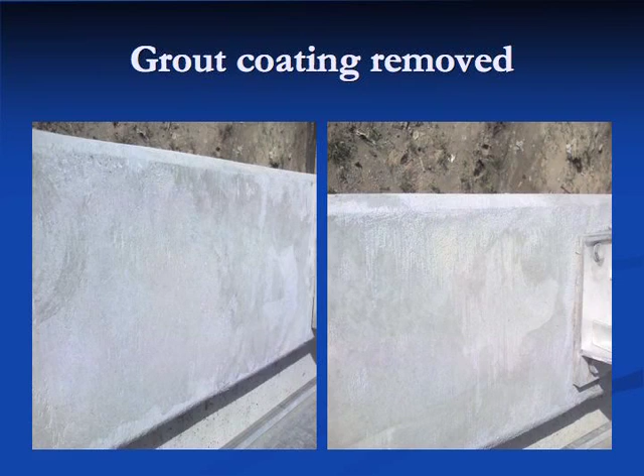So I went from this mess to removing the grout, and I ended up with this. Ground up concrete, ground the top. If I got a good ordinary surface finish, contractors will go on to the next job.

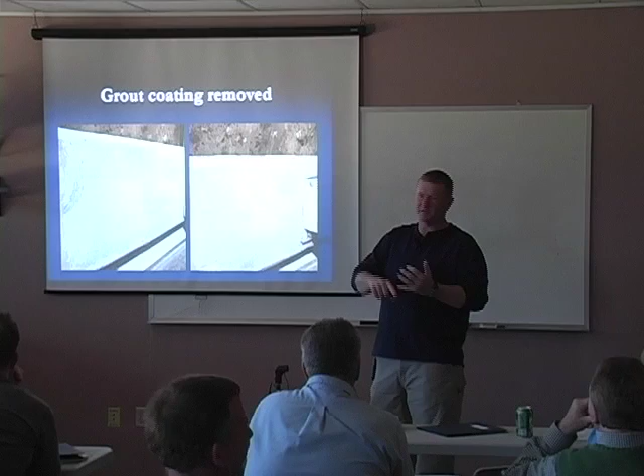Eventually we'll end up buying this, we'll accept it. What are we living with for the rest of that bridge's life? We're living with this. Is this what we wanted? Is this what our specifications say to give us? No. But who's going to end up living with it? Bridge maintenance - who is a part of, believe it or not, one of us. Everybody's part of DOT, part of the state of North Carolina, part of the traveling public. We're all ending up with something that we didn't really anticipate getting.

All right, now we're back to the ugly. Remember that wall I was talking about that we grout coated, that we ground on? This is what that rascal looked like. This was after we pulled the forms off.

And what we got to do? We got to pour more concrete. We got to set the forms, and we got to pour again. It's raining, it's going to rain on Friday. Let's go, let's get it done.

If that required a class 1 finish, if you was a contractor, would that disturb you when you pulled them forms off? Right.

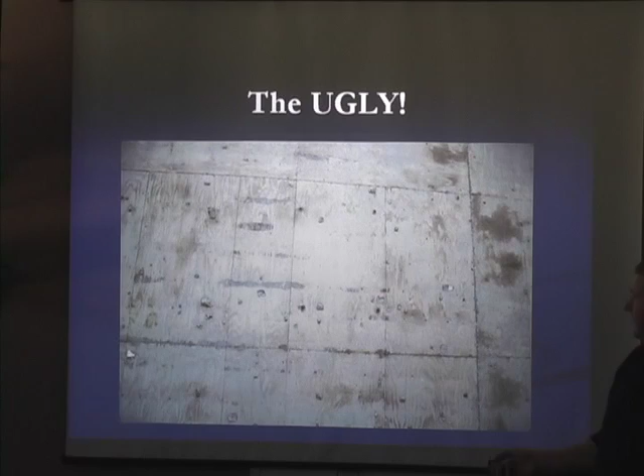I mean, I've got multiple imperfections. I've got all kinds of form marks. I've got form tie holes. I've got voids. If a good contractor pulled it off and seen it, you know, after he fainted and got back up on his feet, he'd go rubbing that himself. We're trying to fix that. Truth be known, this sat out there way too long before we even tried to finish it.

So what did that contractor want to do? I showed you the stucco a while ago, didn't I? Same picture, same picture. You know, can I get class 1? No. Am I gonna get what I pay for? No. So, anyhow, out there is the ugly.

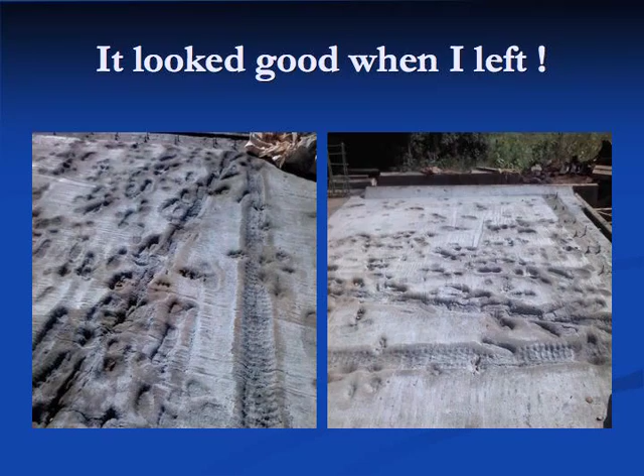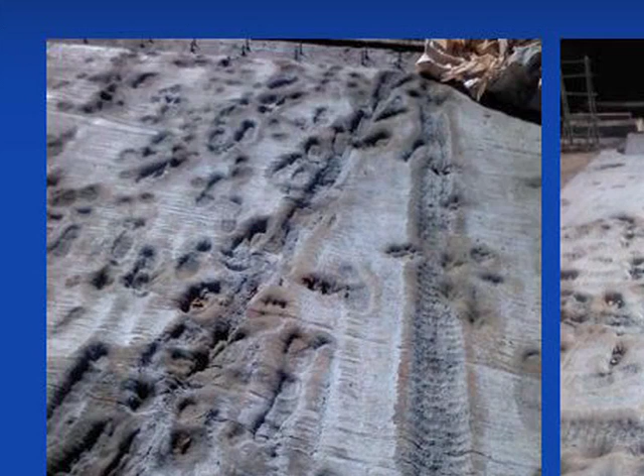Looked good when I left. How long this mess - poured approach slab, everything looked good, covered it up. Boy, let's go home, it's late. You know, started pouring this thing about 5 o'clock or about 4 o'clock one winter day. Covered it up, went to the house.

Kid come along on his motorcycle, had his hound dog with him, the rest of the square dancing team, and boys, they had to go down. They had a good time. Can't fix that, can you? Well, you can, but you got to protect your work. I thought I'd never see anything else.

Nobody else, you know - very seldom, rarely do you see somebody drive through the concrete. You know, same contractors, about a month ago, poured approach side, poured 2 approach slabs, poured this side of the bridge, poured this side. Stayed, covered it up, stayed with it, thought they had the initial set, poured it late today, you know, stayed a while, took off and left, went home. Unique thing about this bridge is that, you know, the road was closed with about a 2-mile detour. Beer joints on the other side of the bridge.

Moped come riding up, got about halfway through the approach slab, maybe got stuck, got off and pushed. You know, one side was good, one side had a few little surface, you know, little small tire tracks. I think we're gonna be able to grind those out. Other side, we're chipping concrete out and doing class 2 repairs to fix it. So I've introduced several construction joints to my approach slab that I didn't really anticipate.

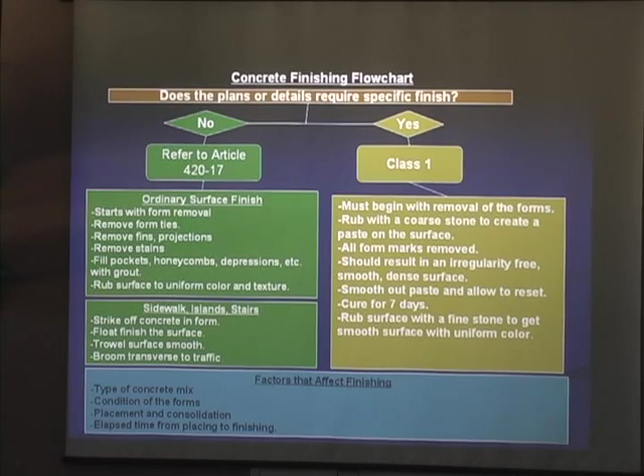Yeah, so the key thing is protect it. Once you get it there, you get a good job on it, you need to protect it. In your package, you should have a little quick flow chart. That's what it is - just sort of gives you some highlights of your ordinary surface finish or your most popular class 1 finish, some factors that affect it, just little reminders, quick for you, easy to see. But list your specifications. Yeah.

Any questions? Any question on concrete finishing?

Key thing to remember, guys, we need to try, you know, get on our contractors and, you know, make them try to say, you know, you're supposed to finish immediately after removing the forms. And we're going to, you know, try to work before we start getting rid of this problem of finishing concrete improperly. Bruce, let's take 10 minutes.